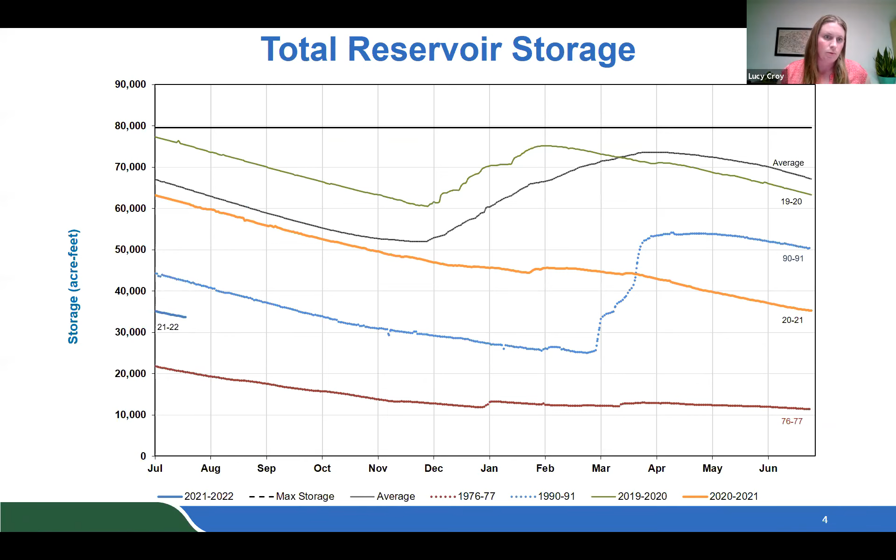As we've spoken about in the last few months, this is really the lowest we've seen at the current total capacity of the reservoir system since we increased the capacity of Kent Lake and added Soulajule to the reservoir system. It's still a bit above the storage levels we had in the 1976-77 drought, and those water supply projects were part of that response. The lowest we got there was just above 11,000 acre feet.

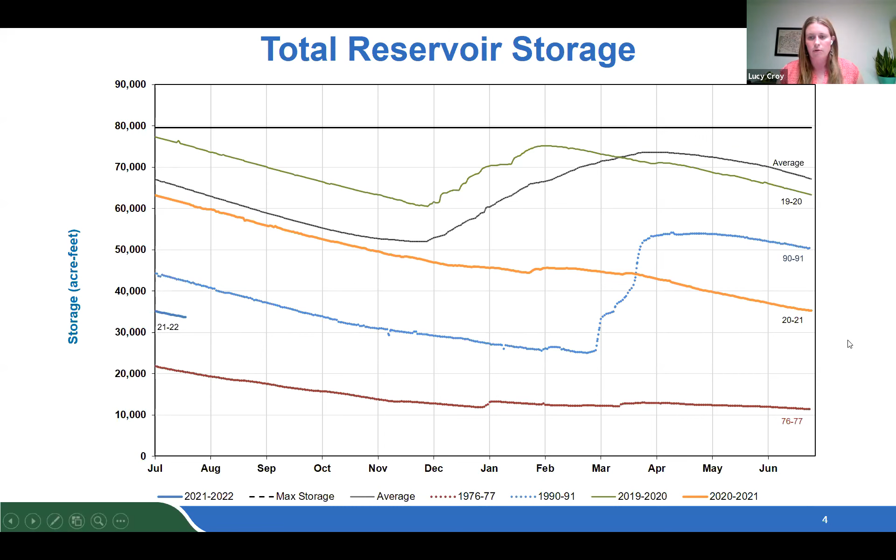So it's quite a bit of savings right there that we've seen, but dropping down closer to the 40% would be ideal. Moving into the fall, winter months, it gets a bit harder to see water savings as water use transitions to mostly indoor use.

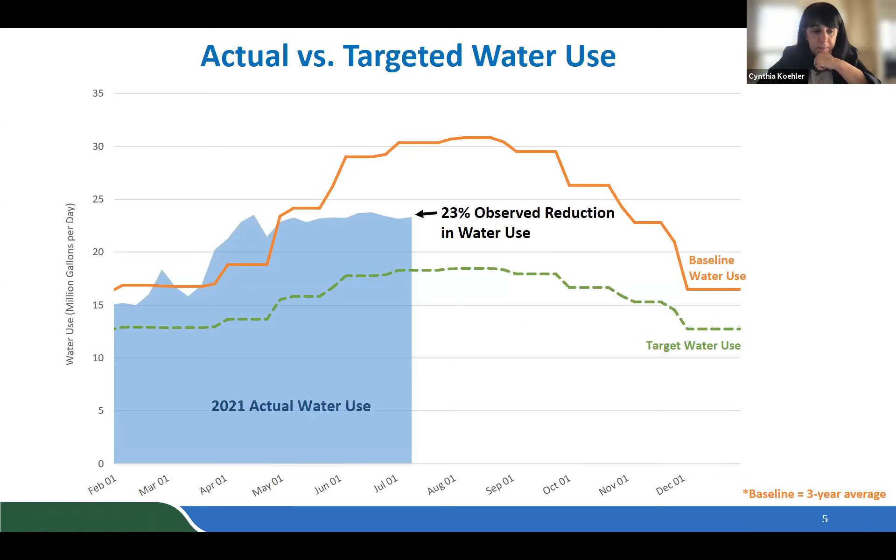So we've added that to kind of see what kind of impact that would have and where that would take us. So moving into the end of next rainy season, so at the end of May next year, we would be just around 60,000 acre feet as a point of interest.

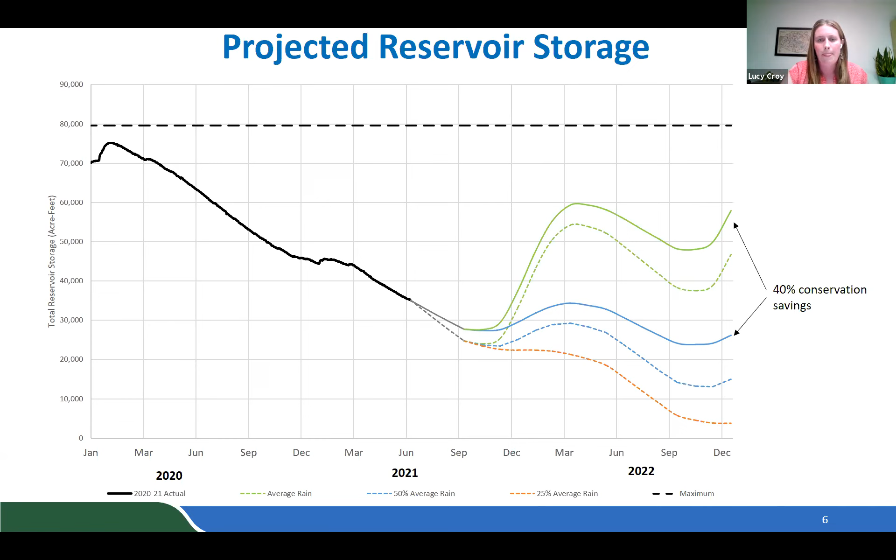Now moving into an update on drought activities and outreach. First off is just a quick update on some of our water supply initiatives. First and foremost is our conservation outreach and efforts underway, and both Jeannie and Carrie will be giving more detailed updates on that. Within our water supply reservoir system, we are expanding how much we take from each reservoir.

So we've been using Soulajule over the past few months, and at this point have now used around just over 1,000 acre feet of Soulajule reservoir, moving that into Nicasio.

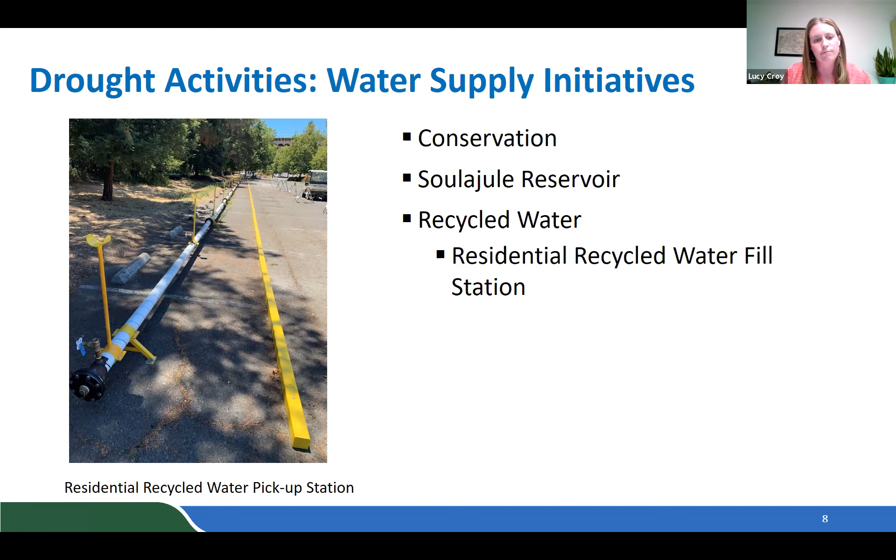So at this point, I'm now going to hand it off to Jeannie and she'll give an update on our outreach.

Jeannie, we can't hear you. You're on mute. Muted. Well, hello, sorry.

So we have started circling back with some organizations, businesses, and homeowners groups that we presented to early on in March. We want to come back to make sure they are aware of the new restrictions and to answer any questions they might have and underscore the importance of conservation. So we're making the second round with many of these organizations.

So I wanted to take a little time to tell you how we are getting the word out on the newest irrigation restrictions. We have a new mailer that was completed on Wednesday, the day after the board meeting, and we were able to get it to the printer and into production by Thursday.

That's great. I just heard it has started going out today. Mailers take a little longer because it's standard mail, but we wanted to make sure we reach everybody, not just people who get the bills, but also renters and businesses who may not be actual recipients of that correspondence. Our goal is to reach over 100,000 people through this mailer, and it should be hitting mailboxes this week. We also did a digital media push, including social media across all channels, and you'll see us continue that over the next few weeks. We really want to make sure people understand the restrictions and know their watering days.

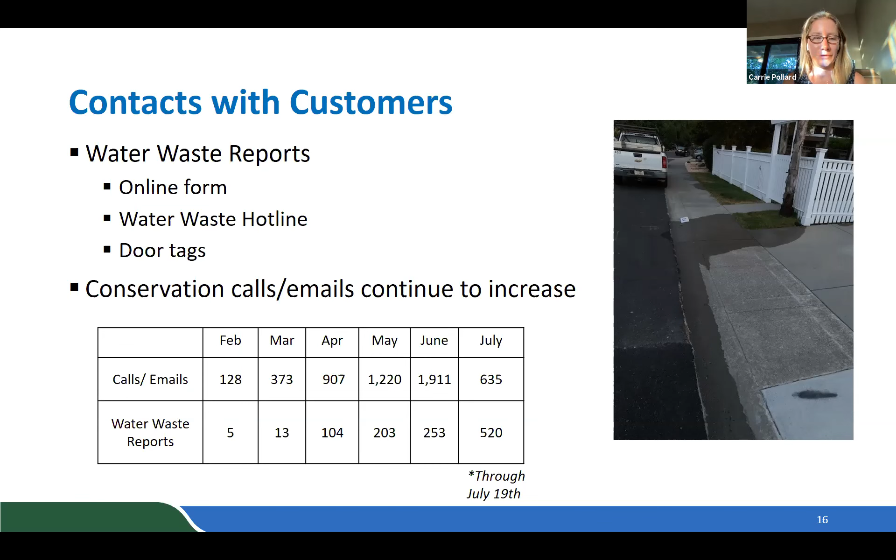Finally, I wanted to wrap up with some additional drought activities currently under development. The board has heard at a high level that we're working on a survey and focus group, so I wanted to provide more detail on the timeframe. We're starting with our highest water users, and we're currently developing the questions, which we're looking to finalize in the coming week, and then we'll start the survey.

The survey will go out. We have a consultant on board who has a lot of experience performing water-specific surveys, so with their expertise and our questions, we think we'll be able to get some good information. We'll have the final results for that survey in August.

As a follow-up, we'll do a focus group to build on the insights and information we gained from the survey.

Furthermore, we're also considering doing the same process with customers who have lawns, to increase our understanding of what would motivate those folks to remove their lawn, or at least make a change to stop or reduce irrigation during the drought as part of drought response. As that lawn survey and focus group gets developed, we'll keep the board updated on status and timing. But right now we're focusing on high water users.

Another resource we're putting together is a landscape professional training series. This will be five 30-minute tailgate sessions focused on our restrictions and survival tactics for local landscape professionals to utilize. We're working with Dr. Dave Fujino from UC Davis.

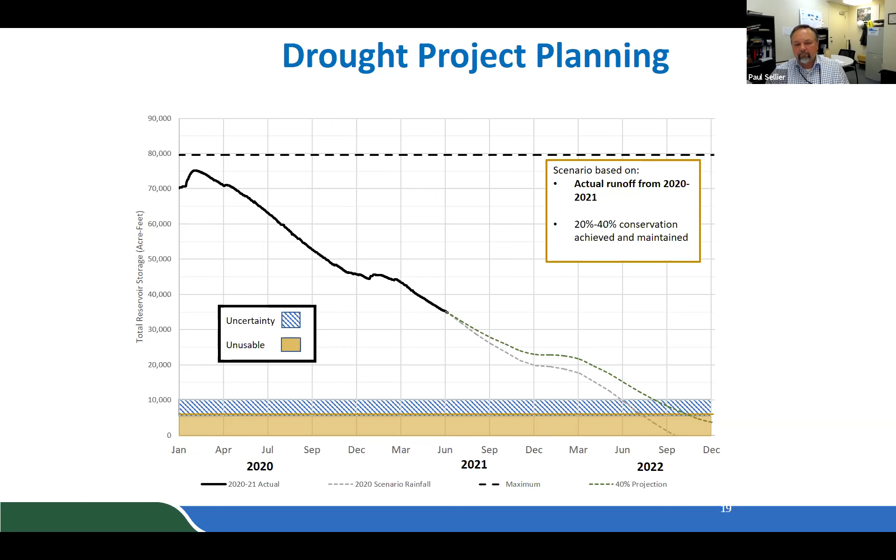Continuing with desal, the regulatory process for desal is not well defined, and there have been no plants constructed on San Francisco Bay.

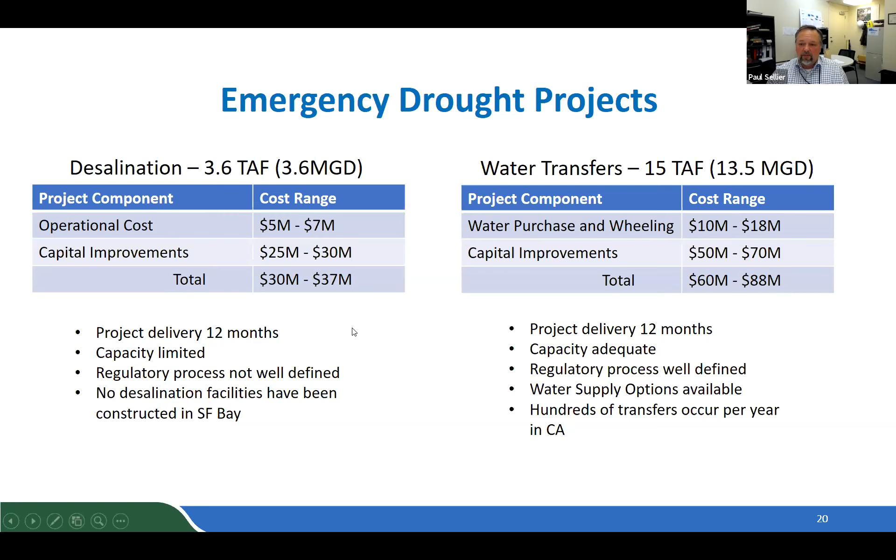Looking at water transfers, the volume of water that we need appears to be available in the range of 15,000 acre feet, or 13.5 million gallons per day, for a total project cost of somewhere between $60 and $90 million. Again, the project does appear to be deliverable within 12 months and the capacity is adequate. The regulatory process for a project like this is well defined, and our indications from talking to some suppliers of water indicate that water appears to be available for purchase. Water transfers are a fairly common feature of water supply planning in California, and hundreds of transfers occur each year.

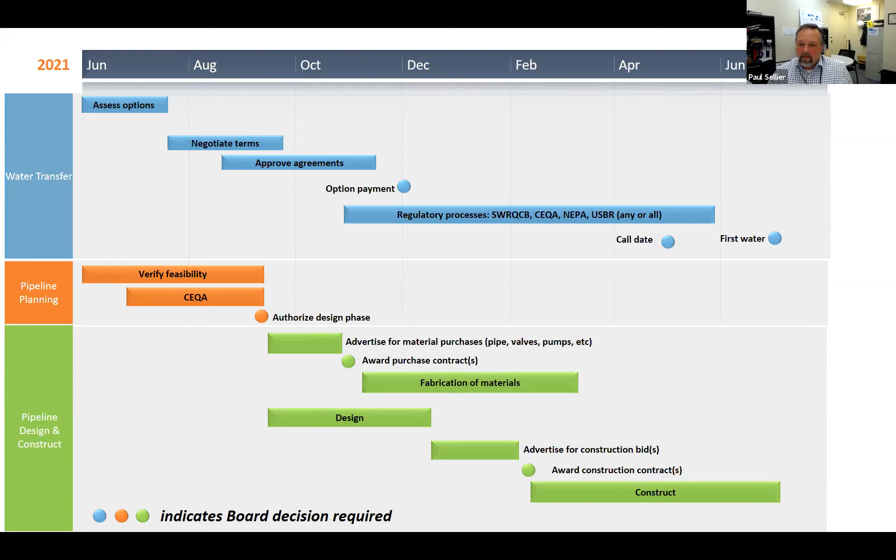So, next steps for the overall presentation tonight: we'll continue our drought outreach efforts, noting that we'll bring our operational data to the board and continue pursuing water supply projects such as the water transfers, which really is the main project that appears able to provide the volume of water we need, at least compared to desal. We'll continue monitoring and reporting to the board on the status of our conservation goals, and perhaps changing those as we go. We'll continue closing with water transfer options and infrastructure planning. I think that's the end of the presentation this evening.

Do we have any board comment on the presentation before we turn to public comment?

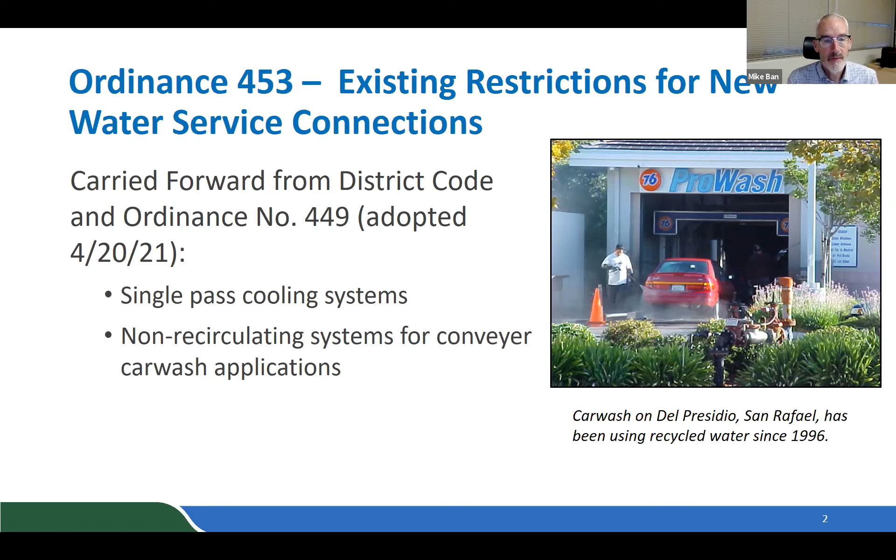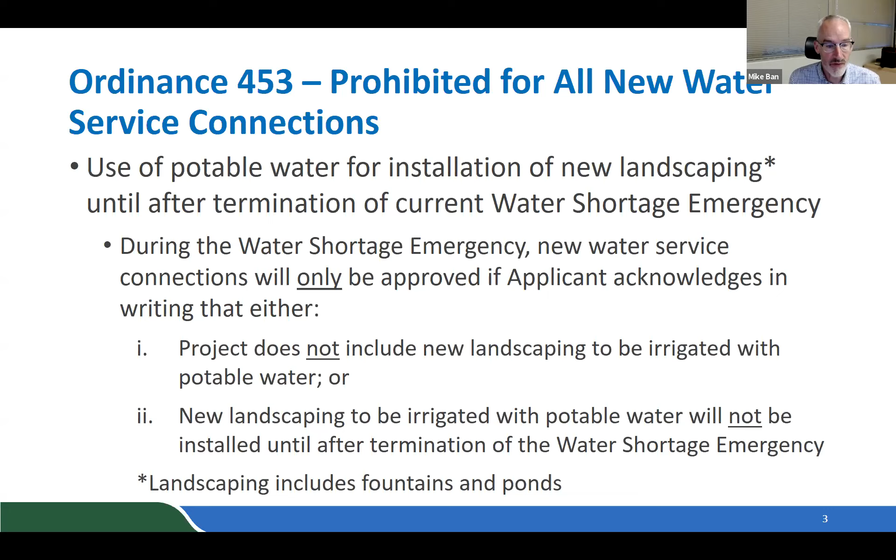And so tonight, district staff recommends the board adopt Ordinance 453, adding potable water landscape installation restrictions for new water service connections. Thank you. Thank you, Mike.

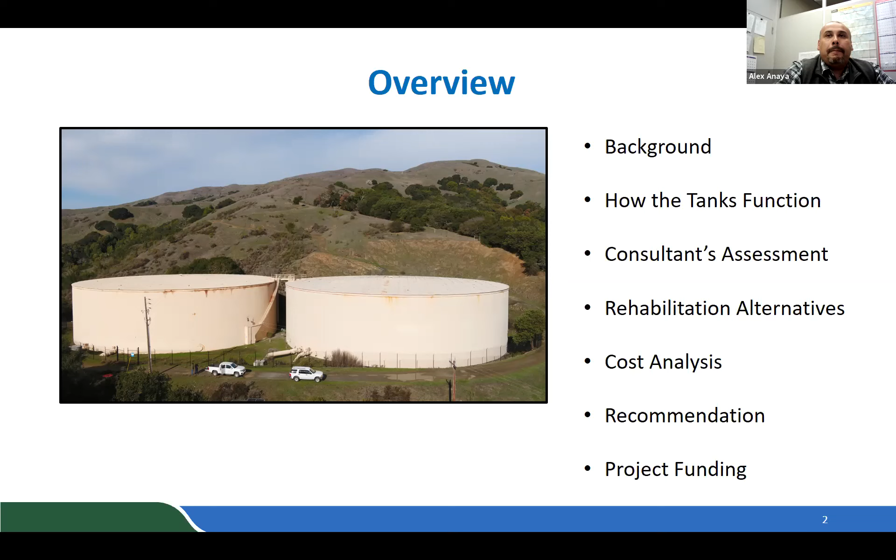Both Smith Saddle tanks were constructed of welded steel in 1960. The tanks function together to provide a total of 10 million gallons of potable water storage for our distribution system.

The interior of the tanks consists of a coal tar coating that was originally applied in the 1960s when the tanks were constructed. The exterior of the tanks were recoated in 1983, and typical industry standards for steel tank recoating frequencies are approximately every 20 years between coatings, with some considerations to environmental conditions.

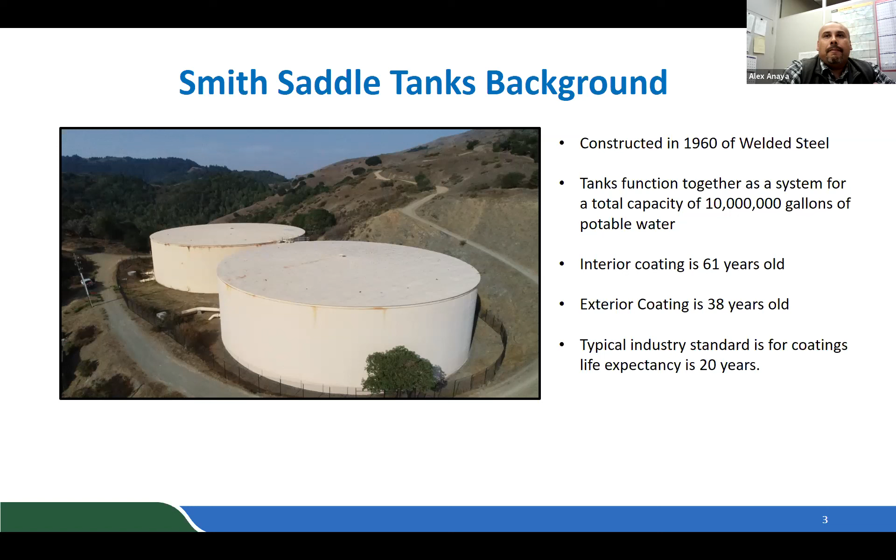The Smith Saddle tanks provide water from our San Geronimo water treatment plant via the 33-inch North Marin line to the tanks. From there, water continues into the communities of Sleepy Hollow, Terra Linda, Lucas Valley, Los Ranchitos, and San Rafael. These tanks are the main transmission storage tank connections that receive water from the San Geronimo treatment plant and provide water to the rest of the district's distribution system. As a result, more water goes through these tanks than any other tank in the system.

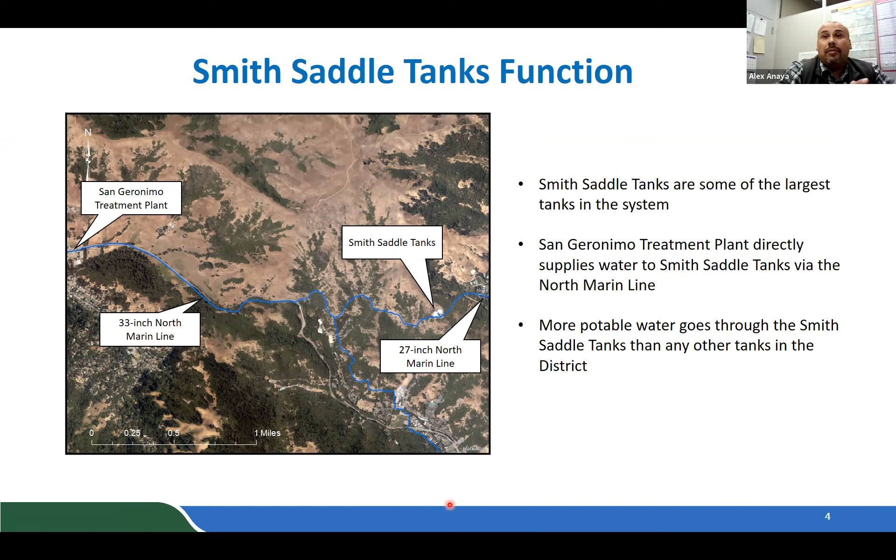Back in February, the district awarded a contract to Kennedy Jenks to conduct a thorough condition assessment of both of these tanks. Following award of the contract, they immediately began with an exterior assessment of both tanks, followed by an interior assessment, one of which involved draining one of these tanks and physically going into it to conduct an assessment by the consulting team.

Corrosion damage was typically observed within the water vapor area above the water level, as well as coating failures below the water level.

At this point, I'd like to turn the presentation over to Don Barraza, project manager from Kennedy Jenks. Thank you, Alex. Can you hear me fine?

There's a lot of detail and information presented in the report, and we don't have time to go over it all, but I'm going to summarize quickly some of the findings of the assessment, focusing initially on the roofs and then on the shell and the floors.

The tank roofs had significant areas of damage that included crumbling and rust chips coming off of the roof, significant quantities and some very large sizes of corroded steel that could come off the roof, especially if individuals are walking on top of the tanks.

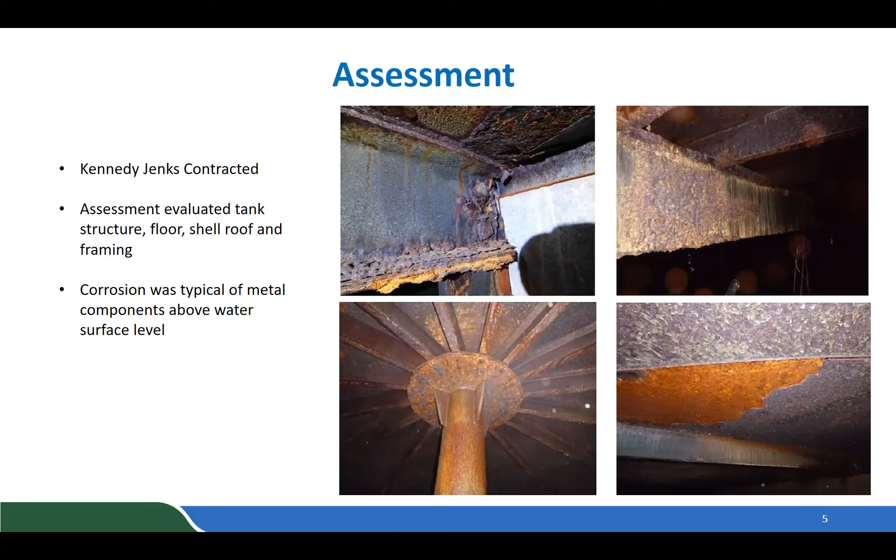The tank floors are susceptible to corrosion damage from several factors, and we saw a lot of damage on the outside associated with insufficient slope away from the floor plates, grading and ponding of water around the tanks. The oiled subgrade and asphalt material in the tanks have eroded significantly, exposing the underside of the floor plate, with the shell of the floor plates and the connection exposed to the underside of the tanks as subgrade materials eroded away.

As you can see in the upper left-hand corner here, the coal tar exhibited numerous blister domes, being fractured and exposing the steel substrate.

While this isn't consistent throughout the entire tank area, both tanks, as documented by divers and our interior inspections, had many floor plates with extensive blister domes on their surfaces. The tank shells, as shown here on the interior and exterior, had significant areas of damage including external corrosion beneath the vent sheet metal panels, rock damage exposing the steel with minor rust, especially on the west sides, slopes and sides. There was mold under the exterior protective coatings, possibly from recoatings placed over and over top of each other. The upper 5 feet of the perimeter shell and interior had extensive coating failure and bare metal exposure. The coal tar was brittle on the interior shells and exhibited numerous blister domes that could be fractured and expose the steel substrate.

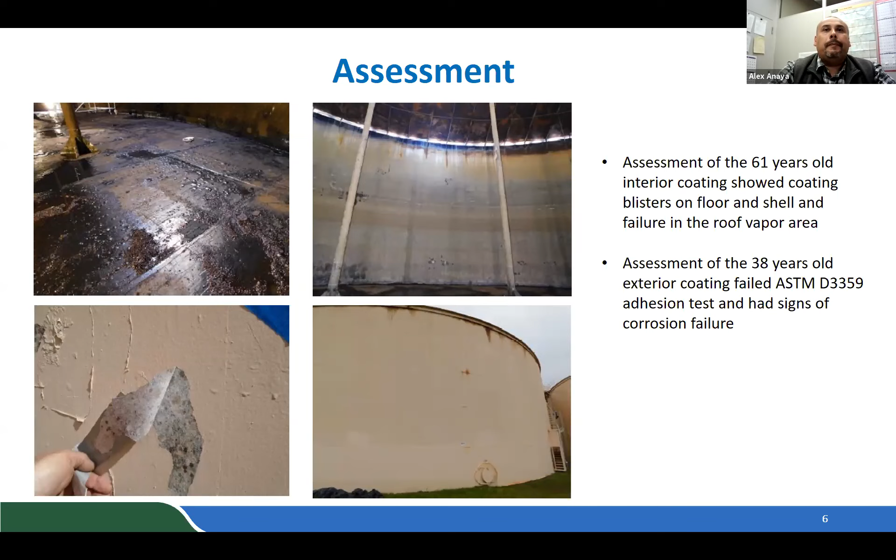So 3 different design alternatives were identified and included in the report after the internal and external assessments were completed, along with the structural and seismic evaluations. I'll summarize what the 3 alternatives consist of, and then talk a little about the costs associated with them. The first alternative developed would be to repair the existing 2 tanks, strengthen the tanks, and recoat the 2 existing tanks.

Typical work in this option would include removing and installing an entirely new roof on each of the tanks and new roof framing members, including replacement of the upper section of the roof support columns, as well as replacement of the top shell ring. The existing tanks consist of 4 shell rings. The top shell ring had the most extensive damage, so it would require removal of that top shell ring, and then extension of the top shell ring to raise the roof of the 2 tanks to provide additional freeboard for sloshing in seismic events to protect the roof of the tanks.

It would include reinforcing the tank floor plates around the bottom of the tanks, and pressure grouting voids beneath the tank floor plates, because significant voids were identified beneath the tank floor plates, along with identifying safety improvements as already discussed, and recoating both the interior and exterior of the tanks, and some improvements to the site drainage system to prevent ongoing damage from ponded water and the other erosion we see around the perimeter of the tanks.

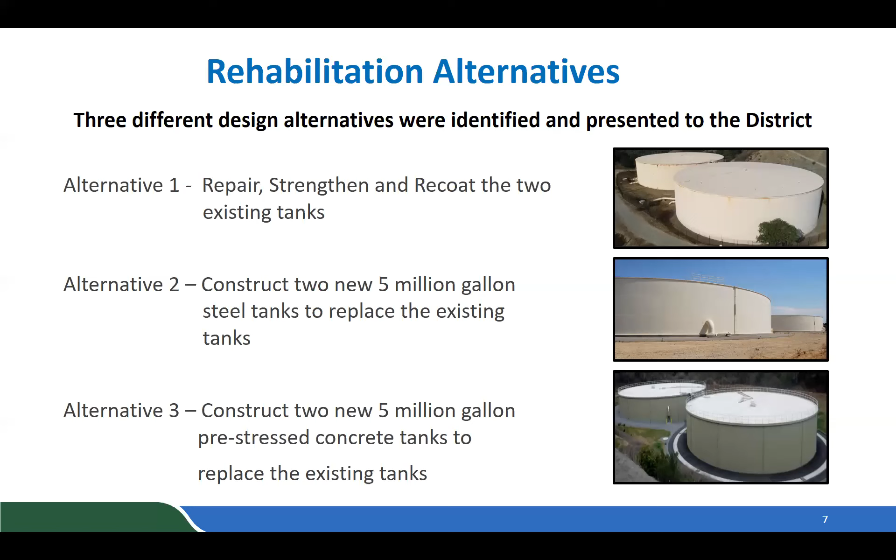If you want to advance to the next slide, Alex, then we can take a look at some of the costs.

As you can see here in this table, you can see the total estimated construction costs for each of the 3 alternatives: 18.6 million for the repair and recoating of the existing tanks, 23.6 million for the 2 new welded steel tanks, and 21.6 million for the new pre-stressed concrete tanks, each of 5 million gallons construction.

In your board packet, you have a more detailed breakdown by division of all of the costs in each of these alternatives, and also notes that provide some of the background on the key elements of the construction cost of the tanks.

The total estimated construction costs for each of the alternatives includes demolition, site improvements, tank reconstruction and replacement, tank coatings, and general markups that you would see on estimates of this type.

I would caution that many people have looked at some of these costs and questioned them in comparison with brand new steel tanks or brand new concrete tanks. Keep in mind that the costs you see in these estimates, in addition to replacing the tank's cost, also have a lot of elements associated with potentially dealing with hazardous materials like PCBs and lead, and the disposal of these materials, legally disposing of them and transporting them to places that can accommodate them.

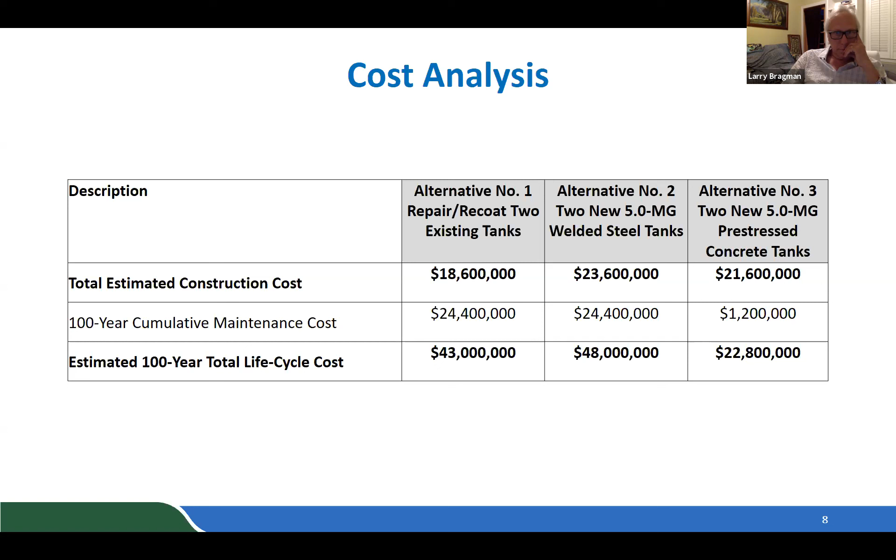In addition to the construction costs shown here, the total estimated construction cost in 2021 dollars, we took a look at the 100-year cumulative maintenance cost to arrive at the overall 100-year total life cycle cost. I'm going to advance to the next slide, and we're going to take a more detailed look at the breakdown of that cumulative cost and how it was arrived at.

Before you do that, Don, can you explain why it's 100 years? You have no explanation in the report how you got to the 100-year life cycle.

Well, the main reason we take a look at a 100-year life cycle is that 100 years is kind of the life cycle that we look at for the pre-stressed concrete tank. We look at the pre-stressed concrete tank as having a 100-year life to it, and so that's why we started with that life for the maintenance costs for the analysis.

Okay, I think you need to explain that in the report because it just comes out of the blue here on the cost table, without any reference to where that came from. Sure. Understood. Yep.

So now, is there any other questions regarding the overall cost estimate before we get into the life cycle cost estimate? Don, I have a question.

Yes. The way I read the report, the pre-stressed concrete does not require internal tank coating. Is that correct? It is correct that we don't normally coat the interior walls of a pre-stressed concrete tank exposed to potable water. Generally speaking, a pre-stressed concrete tank constructed in accordance with ACI 350 with a low water to cement ratio creates a dense, impermeable concrete that normally will provide for the life cycle protection of the reinforcement from corrosion in the tank. So normally we do not put an additional coating on a pre-stressed concrete tank that's exposed to potable water.

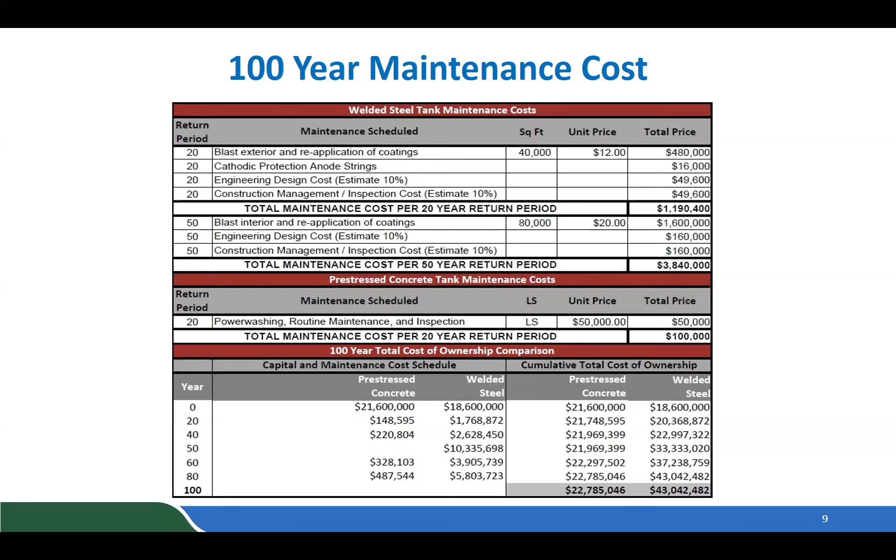Okay, thank you. So before I go on, do we have the time to go through this 100-year maintenance cost table, or should we move on?

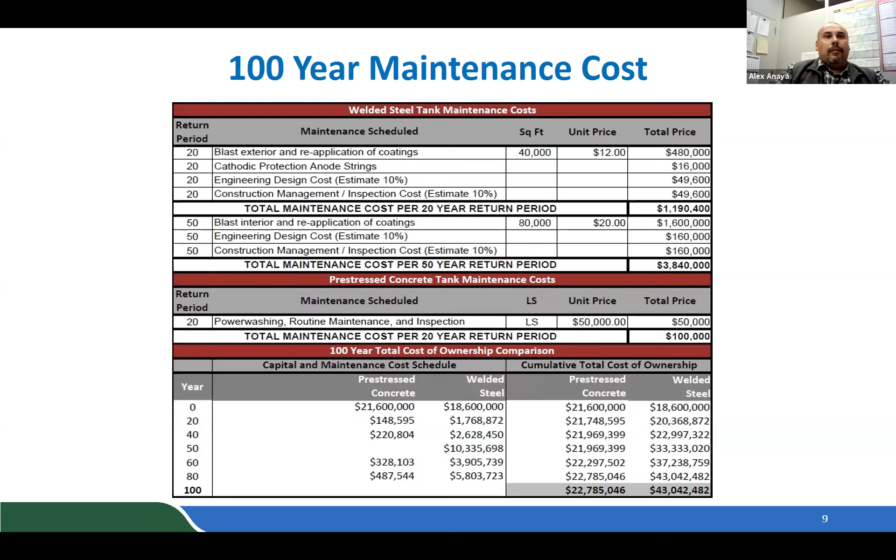My preference would be to move on unless the rest of the board members feel differently. It's already 9:15. I know this is our last substantive item, but we've been here a while. Okay, we'll go ahead and move to the next slide, Don. Okay, thank you.

So in summary, if you take a look at the cumulative costs over 100 years, you can see the cost differential of the pre-stressed concrete tank at roughly $22,800,000 versus $43 million for the welded steel tank. This is the cost associated with rehabilitating the existing welded steel tanks. The cost associated with replacing the welded steel tanks would even be higher. And again, a significant cost over 100 years.

Recognize that this cost is based on a 2% rate of inflation in developing the cost, and that is why the unit costs for maintenance on each of the 20-year and 50-year cycles are escalating so significantly as we get further out.

Could we take a more detailed dive into the costs at our next finance meeting? Or the doc meeting might be better, Larry. Either one, because I think it's worth taking a deep dive into it. I really do, I agree with that. And I think Larry Bragman's right, the doc is a better place than the finance meeting. But either one is fine, it's a significant project. It's in my backyard, so it's of great interest.

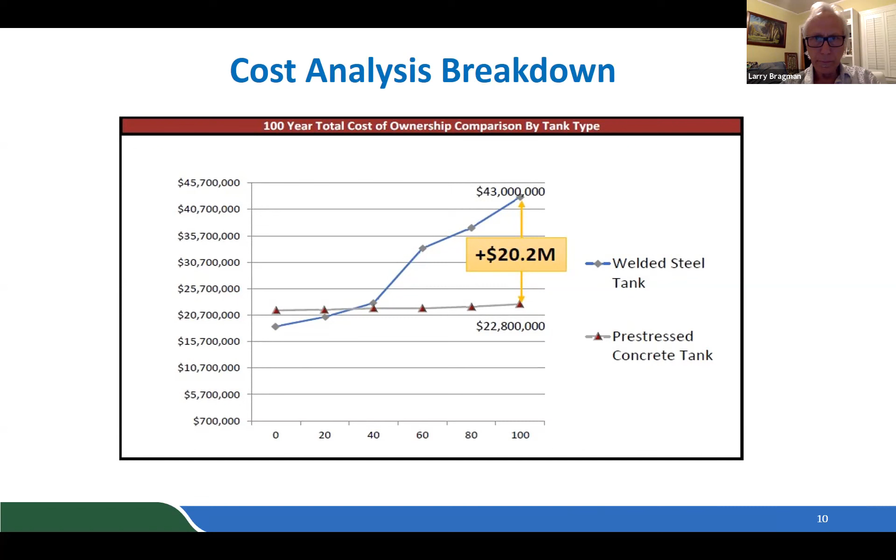So with that, just based on what was presented by Don and Kennedy Jenks regarding the tank alternatives, construction material, estimated costs, and life cycle costs, the recommendation was to proceed with the design of a pre-stressed concrete option to replace the existing welded steel tanks. District staff met together, discussed and reviewed the report, and concurred with the consultant's recommendation for the replacement of the tanks with pre-stressed concrete.

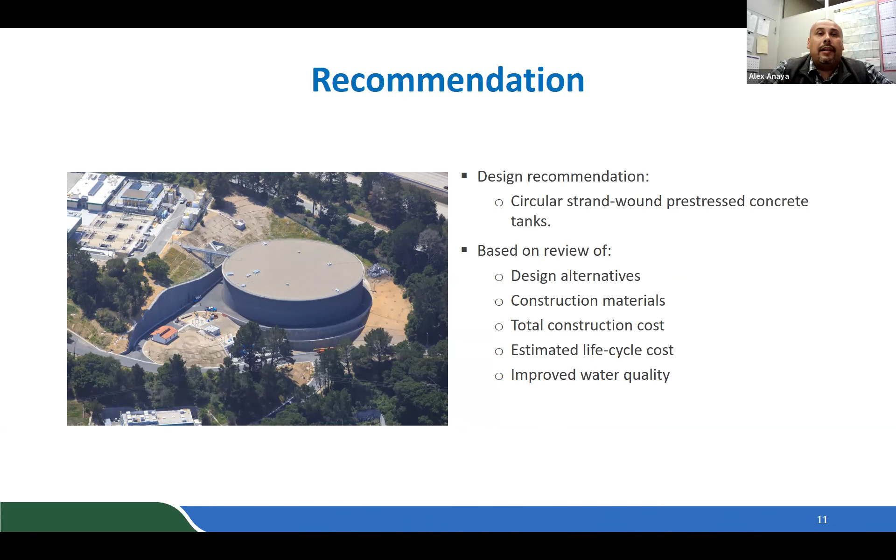Obviously the cost is pretty significant. Currently the district does have the budget to design the tanks in this fiscal year. District staff will be looking into construction funding from various sources, including the state revolving fund, the California Infrastructure and Economic Development Bank for low interest loans, as well as grant funding sources. The benefit of having the tanks designed complete and shovel ready will allow the district to take advantage of grant funding opportunities that may become available for these types of projects ready to go to construction.

Alex, how long would it take to work up a preliminary design sufficient to go for a public works grant? Don, that would be based on the original schedule, about 6 to 7 months for a design. Is that correct, Don? That's accurate, Alex.

We put in that new pump station next to the tanks last year. I'm assuming that would continue to be used and that these would be hooked back into that system. That is absolutely correct, we will not lose functionality of that pump station we just constructed. Okay, thank you.